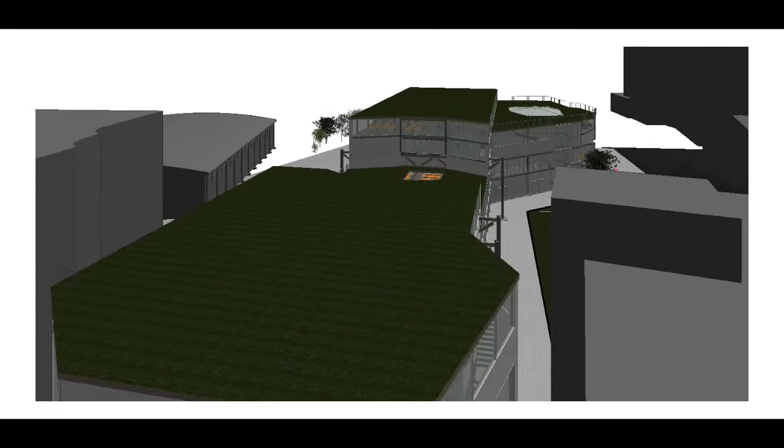Architectural philosophy was mainly led by the relation between the interior and exterior, how the building was affected by its surroundings and how it affects its surroundings in turn.

Throughout the process, the concept was developed with a strong emphasis on collaboration to achieve structural and sustainable needs, in line with input from the other teams within Integro Associates.

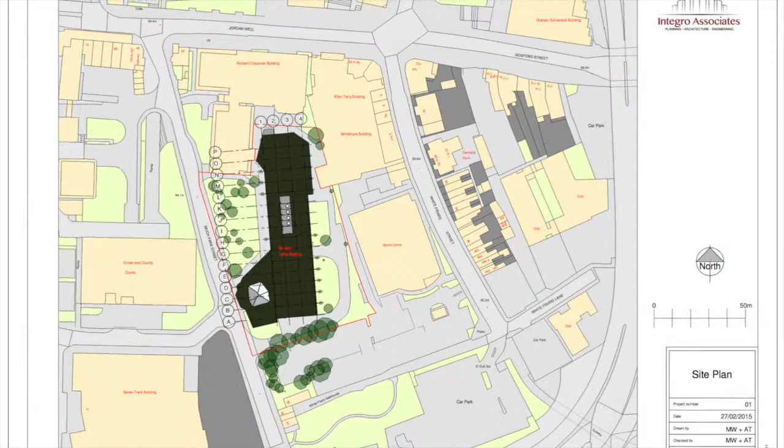The site analysis the architectural team conducted had a major impact on the design process. As the shape of the building took form, it was molded to integrate with existing building heights, green spaces, car parking and access, taking into account the primary access route and focusing on circulation. Pedestrian access was concentrated around the front main facade, while vehicle access was provided towards the rear, allowing supply of materials and parking spaces.

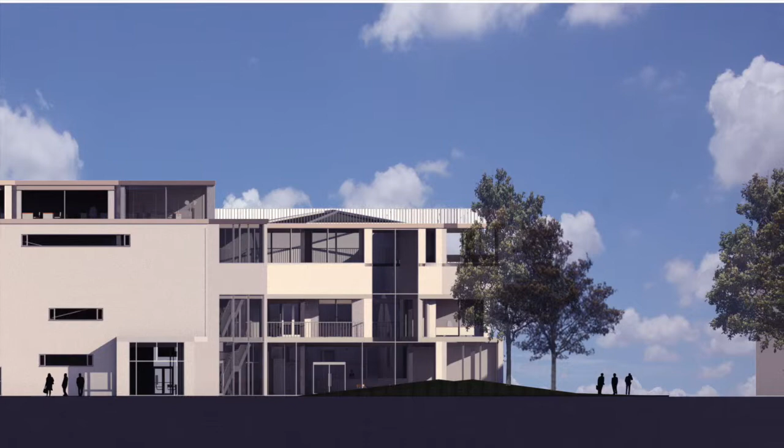The main facade on the west side of the building was primarily glazed to increase sustainability ratings through captured solar gain, controlled by interior solar shading. Trees give natural shading to prevent glare within the internal environment during summer months, yet offer reduced shading during winter. The building design also allows users to open windows, enabling controlled natural ventilation.

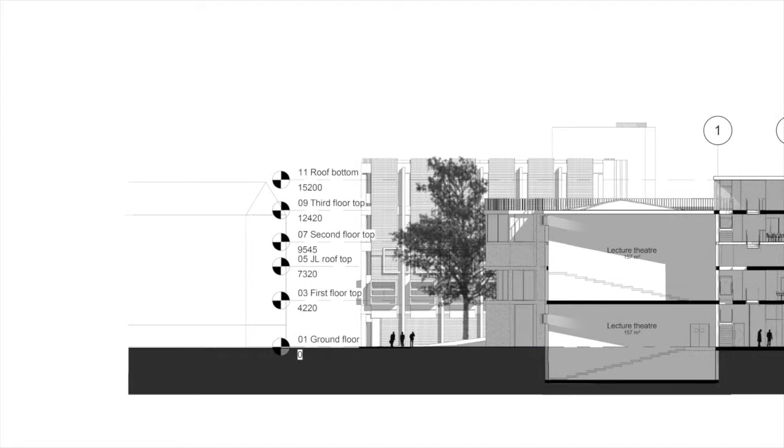The shape of the building was mainly focused on functionality and permeability throughout the building. From the western facade, the spaces are developed to make a transition from public to private spaces the further you travel into the building.

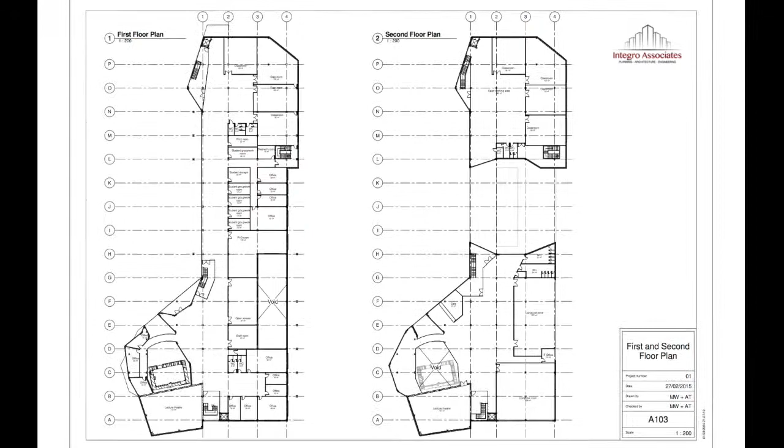Additionally, each functional space was considered in terms of its required open space area. Rooms were assigned to the new or old construction depending on the limitations of the old and proposed structure. Key areas placed to avoid structural conflictions were the computer rooms and the architectural and architectural technology studios.

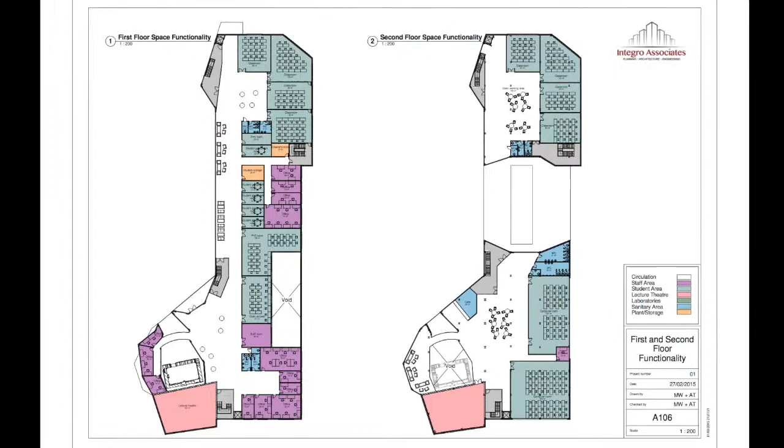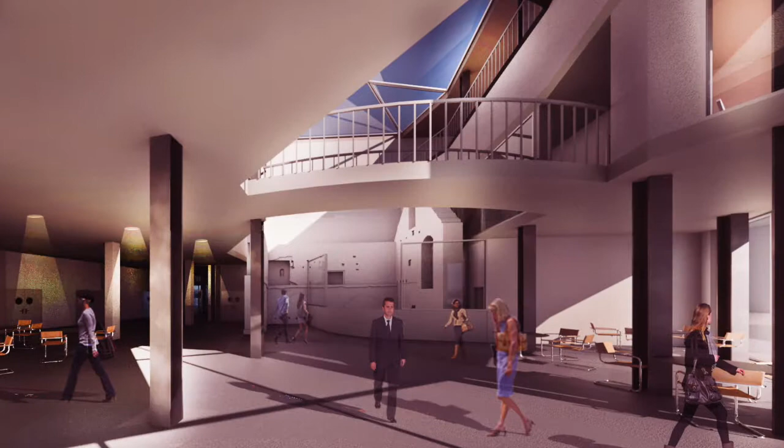The shape of the building determined the breaking up of dedicated types of spaces, which were kept distinct but well suited in relation to each other. To give a sense of relation between the outside and inside environments, these spaces were connected through spacious corridors with sitting and communal areas, giving an airy and open ambience.

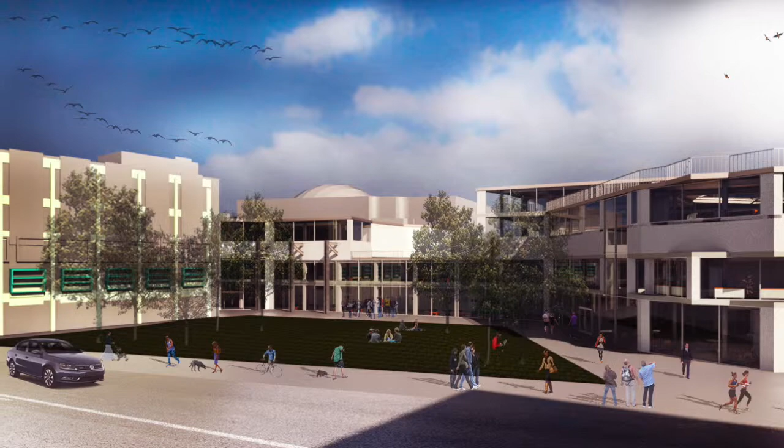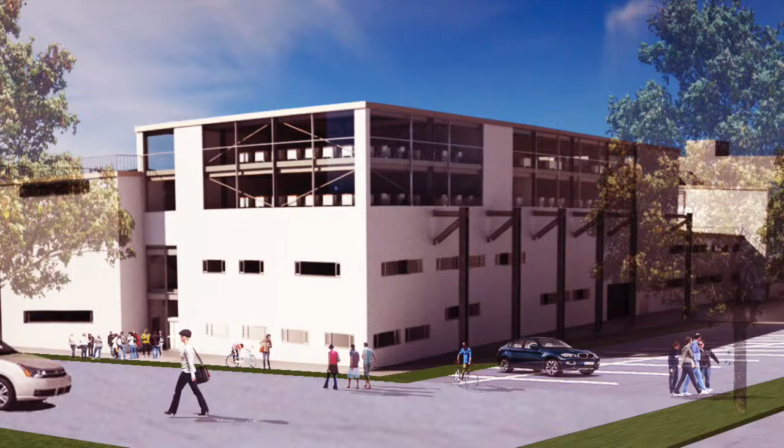The white concrete exterior cladding combined with curtain wall glazing was chosen to represent the modernistic approach with which Coventry University presents itself as an institute of learning. The central section of the existing building portrays the continued development of the engineering department, contrasted with the irregular form of the outer segments that illustrate the artistic activities within the architectural field.

The new structure is designed in a uniform layout, with the majority of beams and columns placed in a grid design sympathetic to the existing structure, while also increasing open space areas, especially in the extension levels.

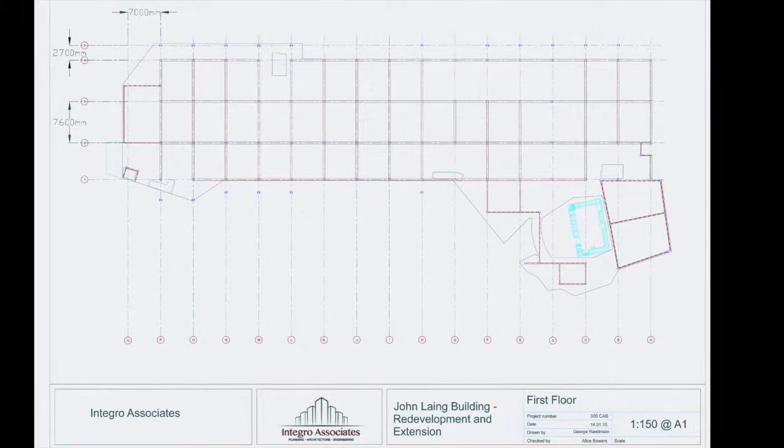A pre-assessment has been done on the BREEAM official website, and a report was issued concluding that the implementation of all the above design options will achieve a very good rating.

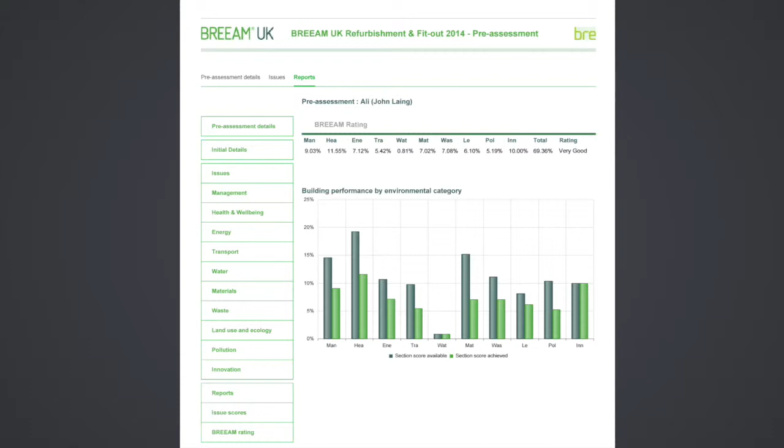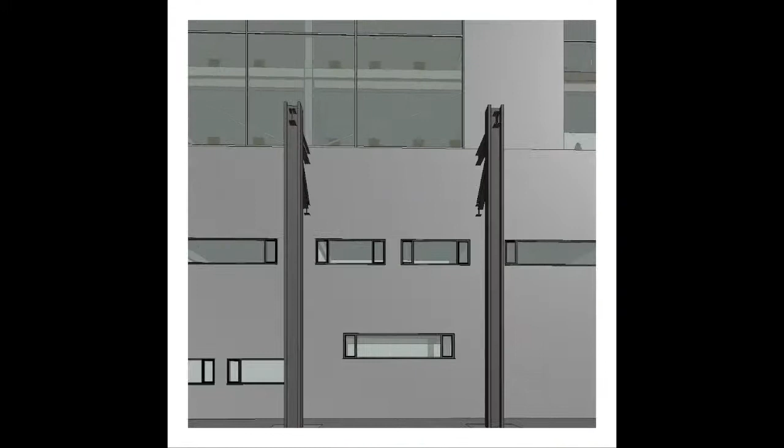The structure is built out of steel for quick erection, higher quality control and aesthetic purposes. It has larger spans, allowing the creation of large open spaces, and it fits well with the exterior of concrete and glazed facade.

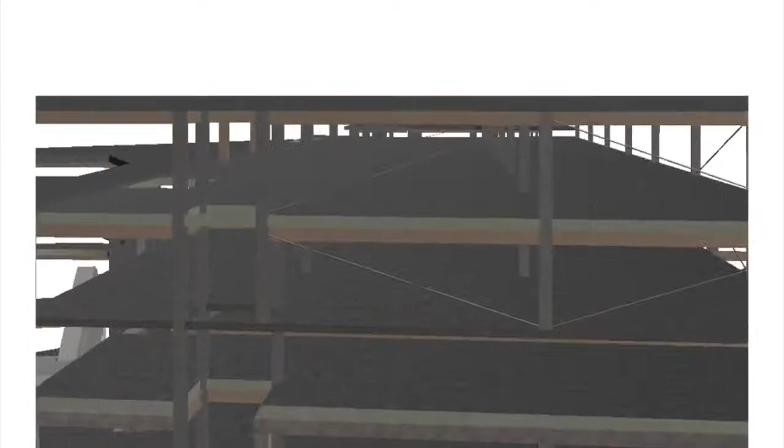The priority in building material selection is to minimize waste and carbon output, as construction materials have a profound negative impact on sustainability. Whilst it might seem counterintuitive, the building should also be designed with its own demolition in mind, ensuring that its materials can be reclaimed once it has reached its end of life.

Therefore, we decided on a steel structure, as it comes with a smaller carbon output than concrete, is 100% recyclable, and achieves BREEAM waste credit.

A large part of working to the BIM philosophy is that as a company we work collaboratively together. This helps us produce better designs in less time, and means design issues are brought up sooner, as all teams are looking at the design through all stages.

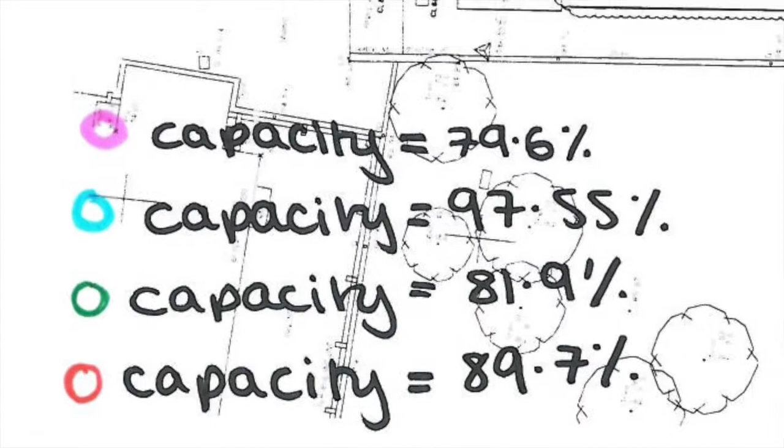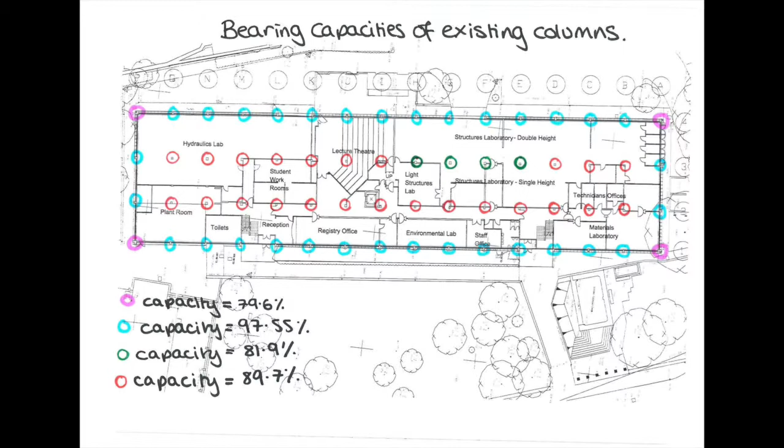The new structure is completely freestanding, ensuring no additional loading is placed upon the existing columns. Moreover, measures will be taken to ensure that the existing structure remains structurally sound during and after construction.

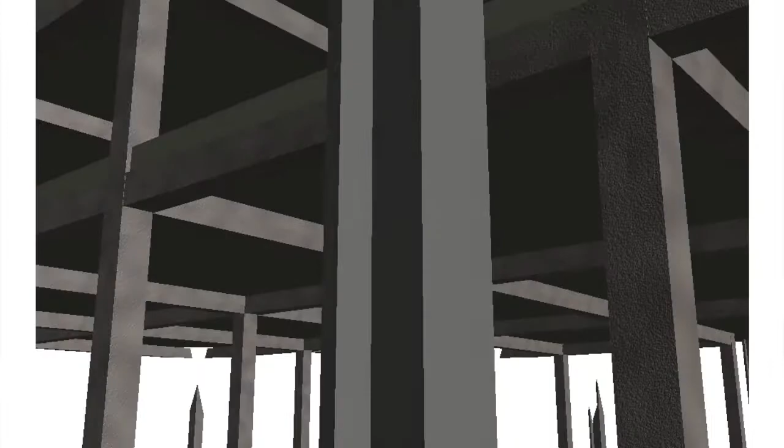To make the new structure freestanding, a truss system will be installed. The truss system will span across the width of the existing structure, taking all imposed loading from the extension. The truss will be attached to separate freestanding columns either side of the exterior of the building, transferring the load down into deep pile foundations.

The new foundations for the John Laing extension are all monopiled, with only 2 different diameters. This means they are easy to install, cost effective, reduced in noise pollution, and the least environmentally damaging to surrounding ecosystems.

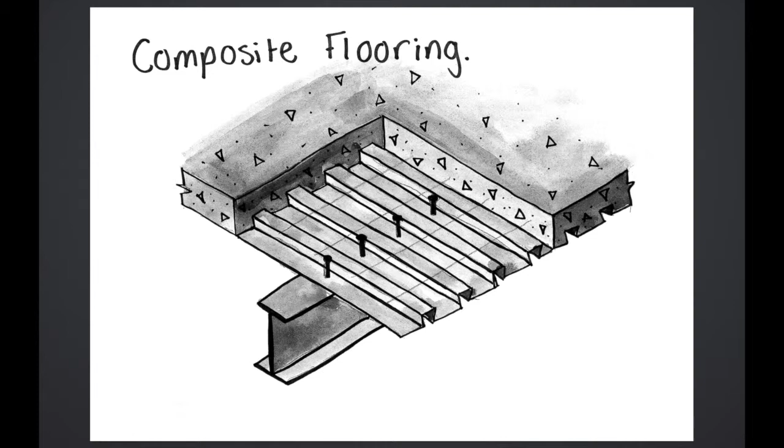Composite flooring has been used to maximise the best properties of two materials, steel and concrete, producing an economical, fast and simple flooring design. This has also been used for the roofing scheme.

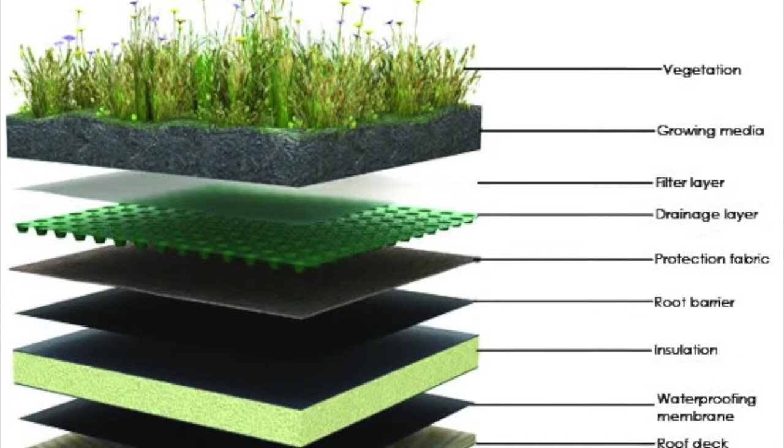Grassland living roofs, which involve the use of limestone chippings and mixtures of crushed brick and concrete, can support as many as 30 species per square meter, so even a small surface will potentially be home to many different plants. The green roof also acts as thermal insulation and contributes to the reduction of surface water runoff. It is cheaper than conventional roof insulation technologies and extends 2-3 times the life of the roof.

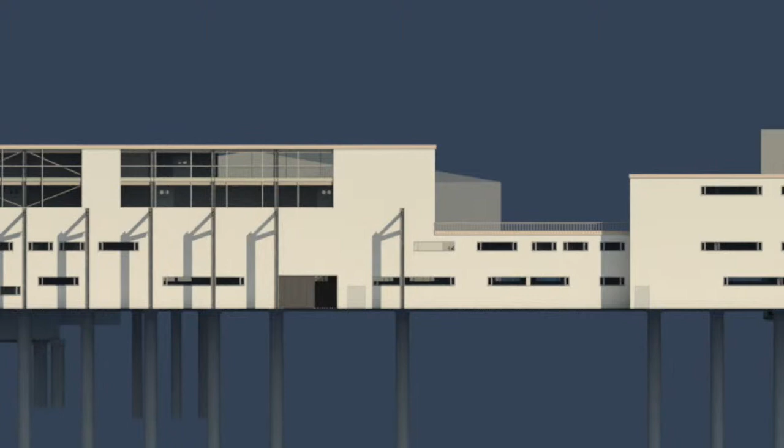Most green roofs will require maintenance only once a year. All concrete in the structure is cast in situ to make the concrete homogeneous. Spray concrete will be used for the external white facade.

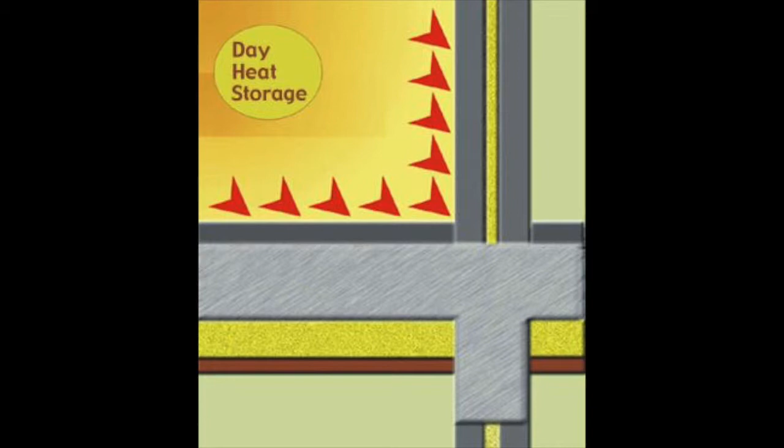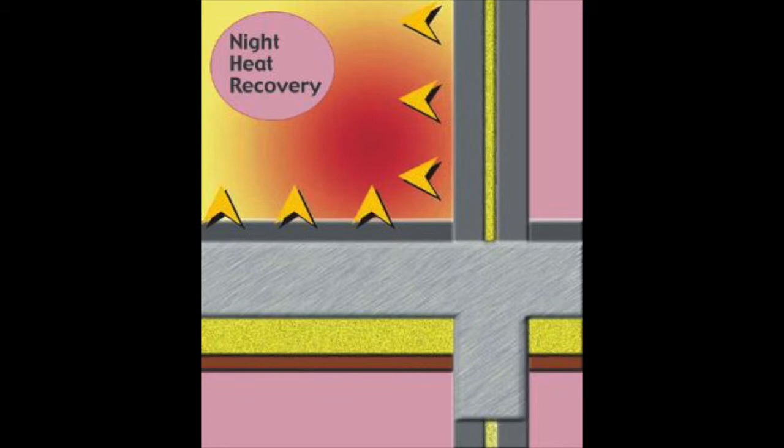Although it will be mainly a steel structure, the high mass of the composite flooring will provide a significant thermal reservoir with the capacity to store large amounts of energy. In cold weather, floors absorb and store interior heat during the day, then radiate warmth back into the conditioned space at night. Conversely, when outside temperatures are high, the same principle holds true for cooling. The inherent ability of concrete to maintain a steady interior temperature reduces peak demand on cooling equipment.

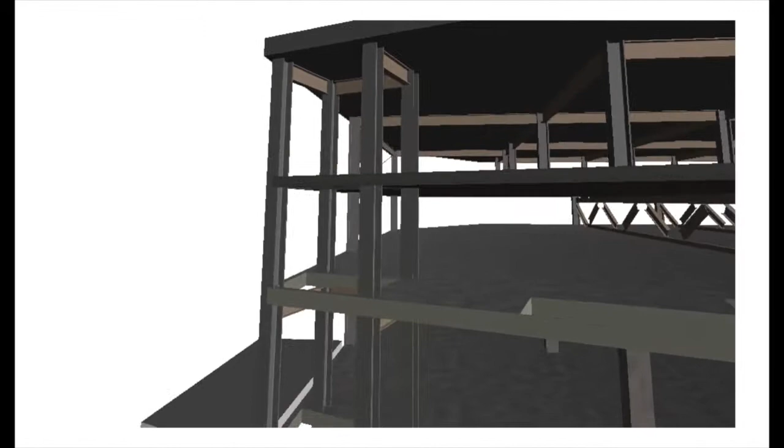To help ensure the durability and robustness of the structure, the new columns have been designed with an allowance in the redundant bearing capacity. This will help prevent progressive collapse in the case of accidental damage. Furthermore, an additional benefit of having redundant bearing capacity in the beams and columns is that it allows for greater flexibility in the use of the building in the future, as well as additional expansion and further development of the green roof.

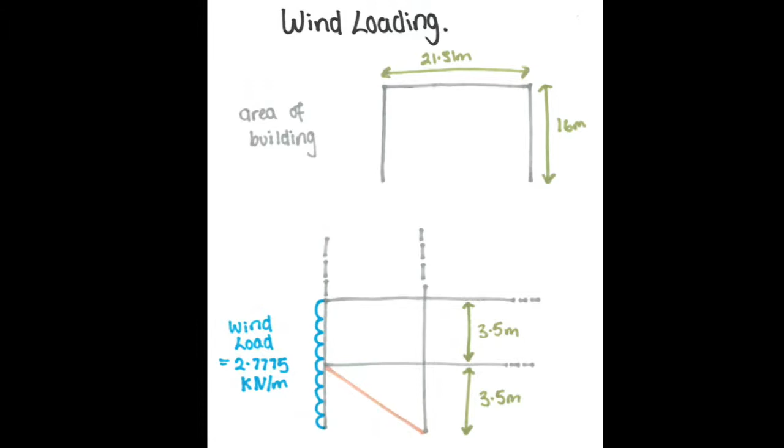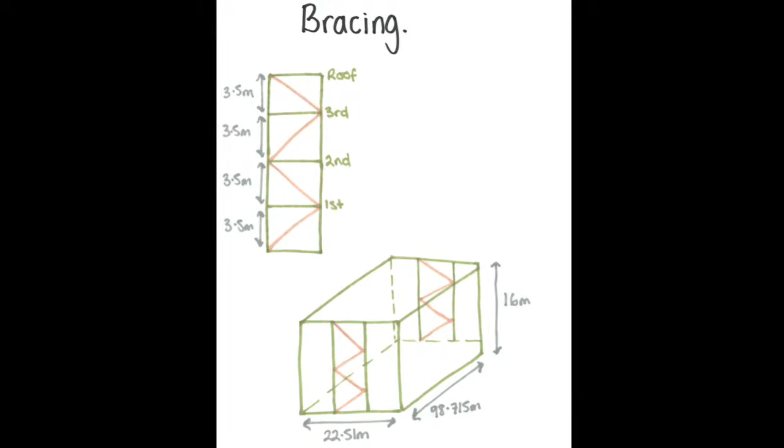A steel frame is weak to lateral forces or wind. In order to enhance stability within the structure and account for this, the design has 2 steel shear cores around the lift shafts. Additional bracing members are placed on the north, south and west sides of the structure to transfer the lateral wind loads into the ground.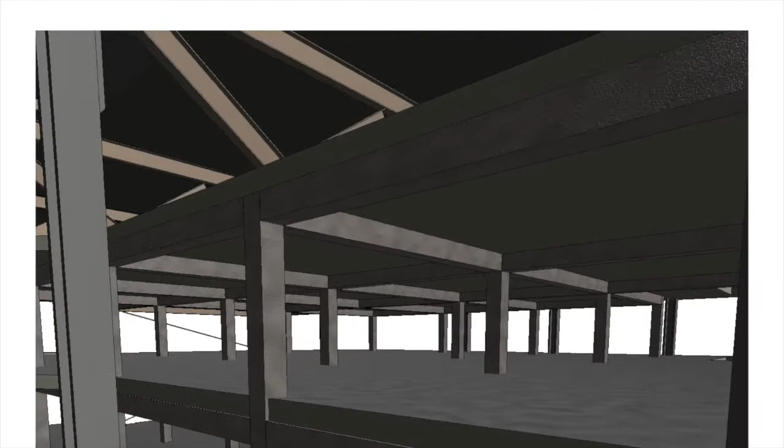Fire protection regulations are met throughout the building by using intumescent coating, which gives 120 minutes of resistance. External members will be protected from corrosion by hot dip galvanising with a sacrificial metal to ensure a long-term design life and a reduced maintenance schedule at handover, whereas internal columns will be encased for added protection and to fit with the architectural aesthetic scheme.

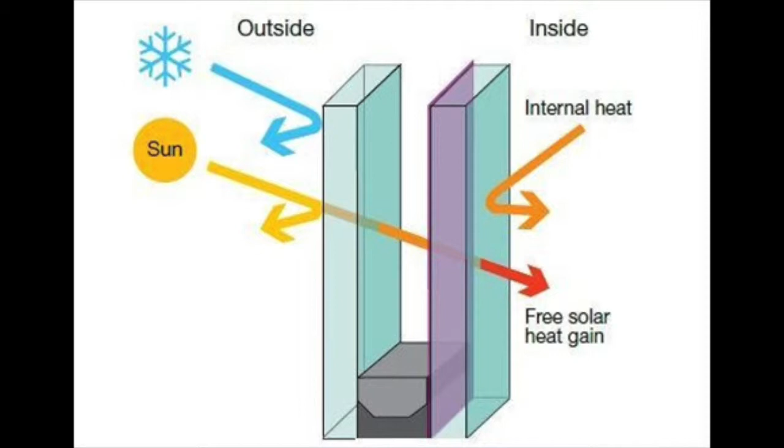Solar control glass is a high-performance coated product that allows sunlight in while repelling solar heat. This technology is beneficial in hot summer days when it can help reduce the load on the building's air conditioning system, thus reducing energy demand. In addition, solar control glazing comes in double glazed units, which also provides insulation in winter. Solar control and low emissivity properties are combined into a high-performance glazing unit, further contributing to insulation from both cold and heat depending on the season.

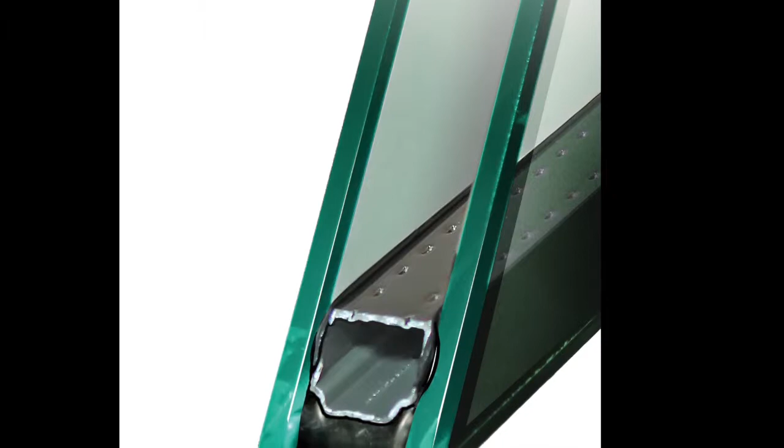The large glazed areas will also allow daylight to enter into the building, therefore reducing the need for artificial lighting. Thanks to these properties of double glazing, we can now incorporate large areas of glazing into the John Laing design, knowing there will not be any negative impacts on the energy performance of the building.

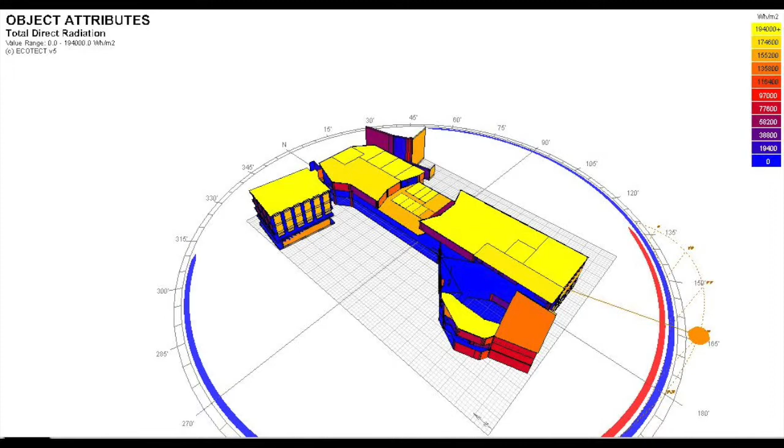Implementing renewable energy technologies can be very expensive and may not be applicable for the John Laing building, but one of the most effective ways we can reduce the building's carbon emissions and achieve the BREEAM credits available for this category is through changing the source of its power supply. This can be done very simply by just switching the electricity supply to a company which is fully committed to renewables. It requires no initial investment and doesn't take more than 3 weeks.

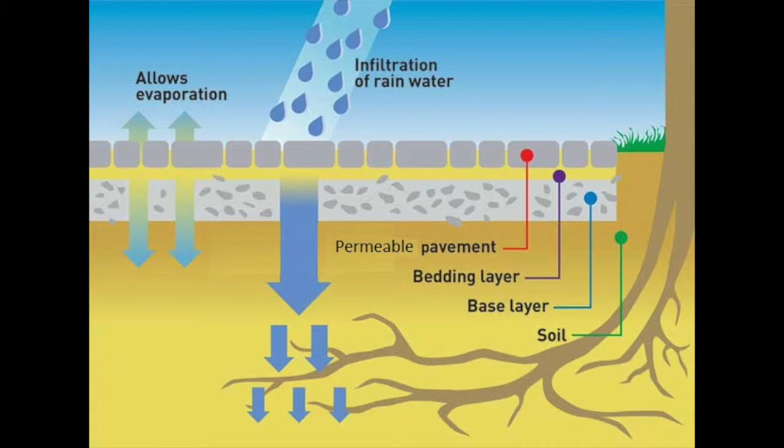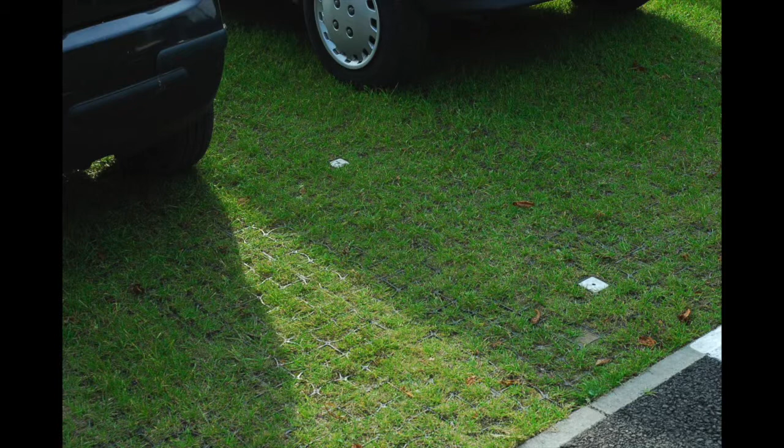Flood risk, surface water runoff and pollution are among the most highly legislated and monitored areas of planning and construction. Surface water management is one of the mandatory areas in the BREEAM assessment, and the use of permeable block paving achieves an A or an A+ rating in the BRE Green Guide, gaining BREEAM credits. Therefore, the surface of the John Laing parking area and the adjacent pedestrian pathways will be replaced with permeable paving, creating a modern-looking surface and contributing to attenuation of urban flood risk.

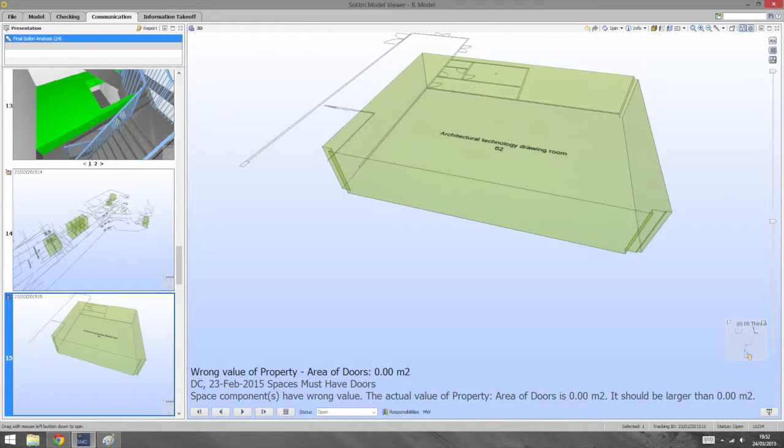We will continue to analyse and evolve the BIM model, using Solibri Model Checker to carry out regular clash detection and other analysis of our design, saving a lot of time by effectively cutting out issues which may otherwise arise during construction. The BIM model will also allow further disciplines such as M&E to add their models for further collaboration and checking.

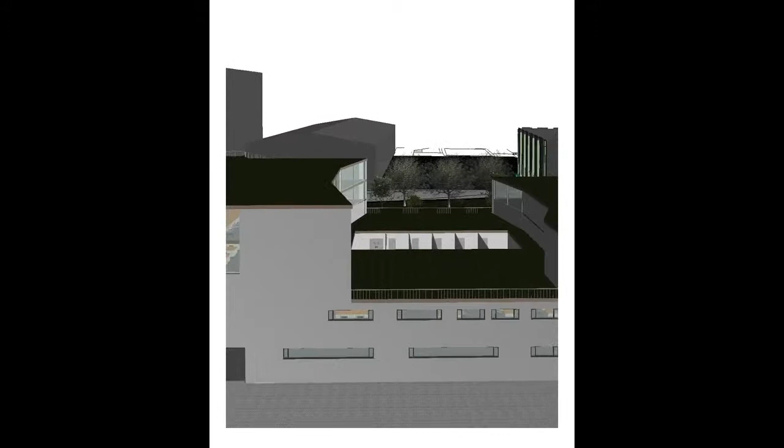One of the key features of the method statement is the spray concrete on the external face, which is innovative to the design. Further, lots of consultation with stakeholders is planned to minimise disruption and make them fully informed about the work plans and programme.

Health and safety is key for Integro associates, which implement the Don't Walk By policy to ensure everyone who enters the site goes home safely to their loved ones.

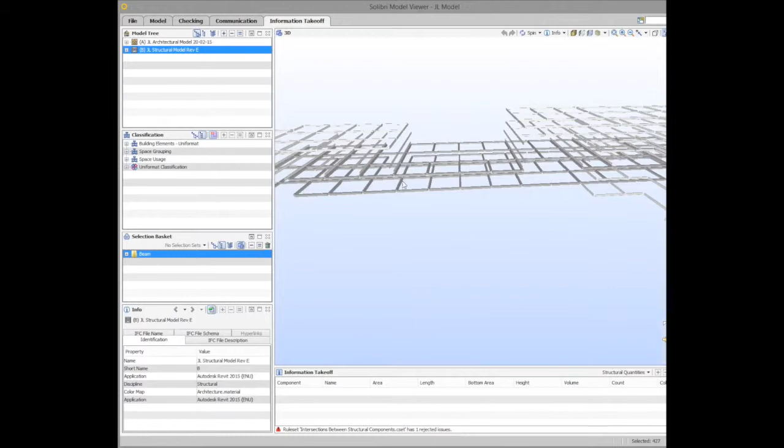Using Solibri, we can provide data takeoffs and COBie drops, allowing for 4 or 5D BIM coordination. This will help massively with scheduling the construction and will hopefully help reduce the actual time taken for construction. It will also help with pricing the project as all components are listed and detailed.

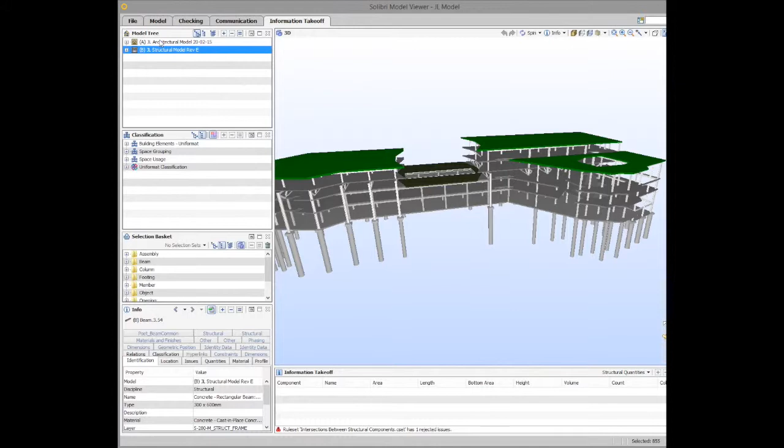At handover, we are able to issue the client with a 3D as-built model containing all data. This will help with future maintenance as it provides an easy access record of what exactly has been built, with full component details down to the specification of a single light fitting. The data in the model will also be extremely useful for future modifications to the building.

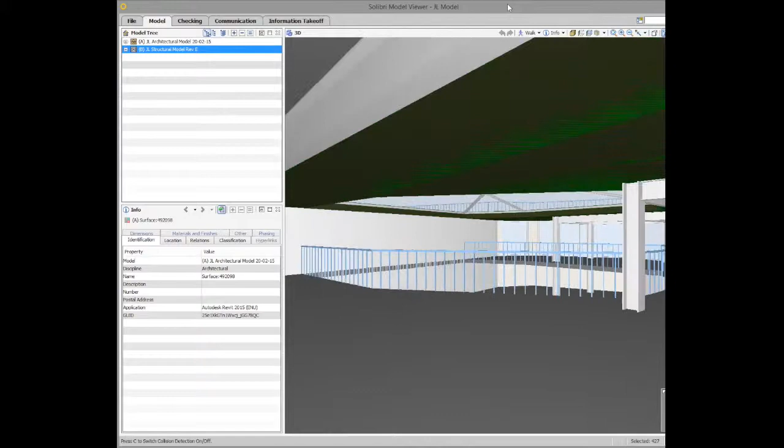Next year it will become mandatory for all public building projects to be completed to BIM Level 2, which is a managed 3D environment. Although this project is privately funded, BIM is the future, and Integro associates believe this project provides the perfect opportunity to cultivate this vision.